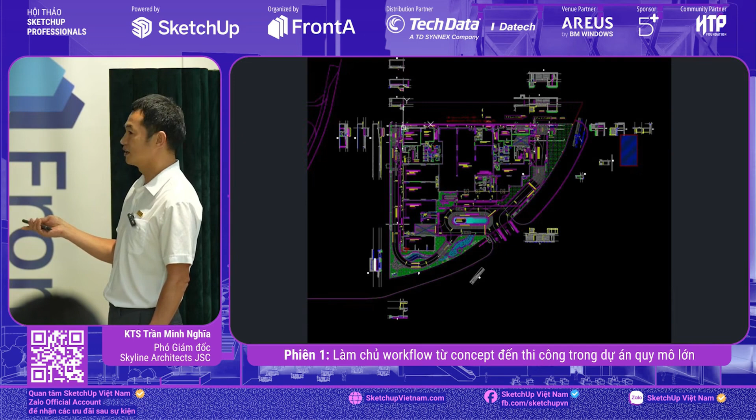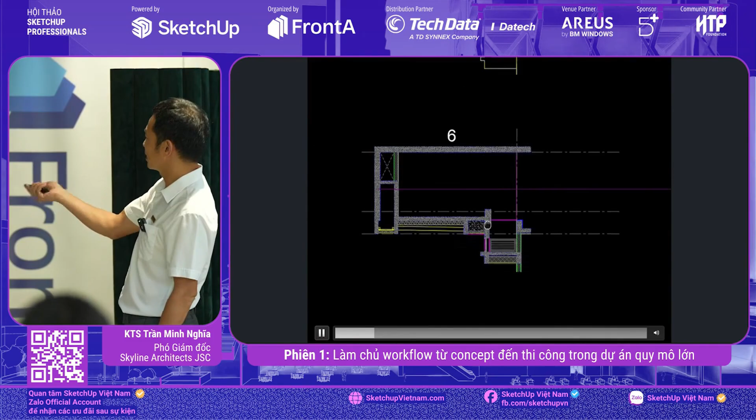Previously, our team used this system. For example, even just for the ground floor plan, we had to create loads of sections for coordination.

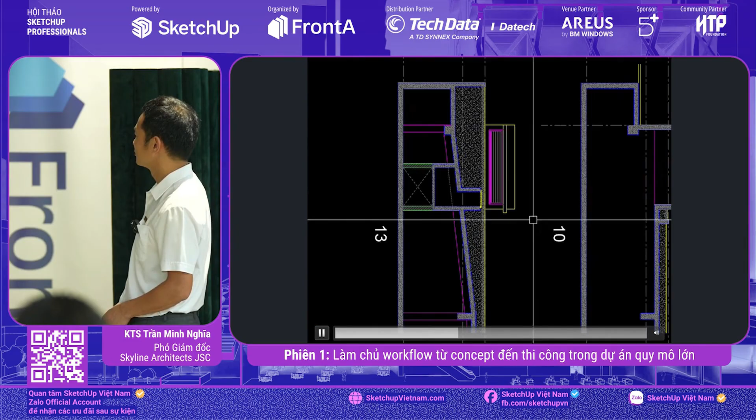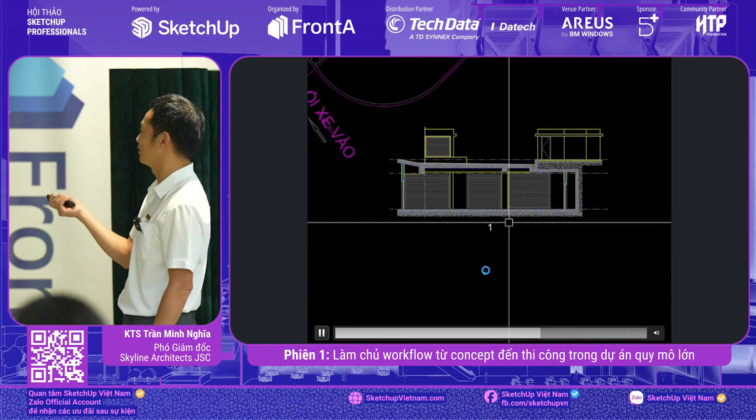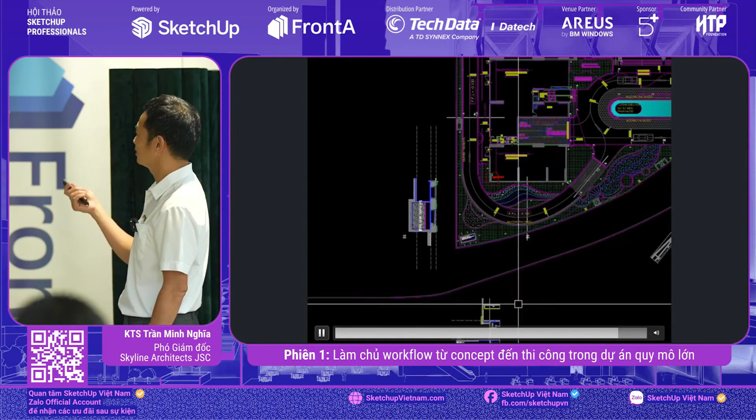The problem with this is that if the structural team changes the beam dimensions, updating everything is absolutely exhausting, and you can never manage to update it all. This leads to situations where something shown might not actually be correct. A lot of effort goes into this, but if a project drags on with lots of revisions, it almost becomes pointless.

Fourthly, with 2D drawings, when you look at them, they all seem perfect. Everything is presented as if it is perfect on its own, but it doesn't actually match up with the other drawings. It's very difficult for the person in charge to check those things. When partners and investors look at the 2D drawings, they can't really visualize the space. With a construction design dossier containing hundreds of drawings, people have to go through each one individually to try and imagine what the final product will look like. Those are the issues with this 2D system.

What's the drawback?

After that, I moved to a foreign company, and that's when Revit was introduced with a whole host of extremely useful features. When drawing walls, you just need to draw, and it already has the brick layer and the plaster layer. With AutoCAD, you have to offset and go through quite a few steps. The walls automatically connect with each other, so you don't need to use the trim command, and when you draw the floor plan, using the cut line immediately gives you the section, detects clashes, and everything else. I found that this was clearly like a saviour compared to the system I was using. Really impressive.

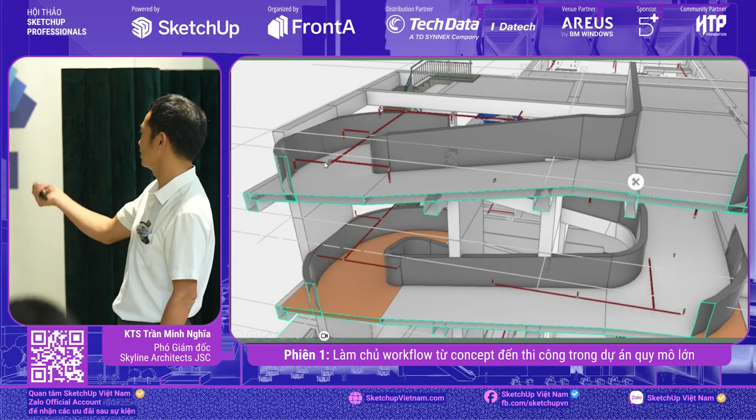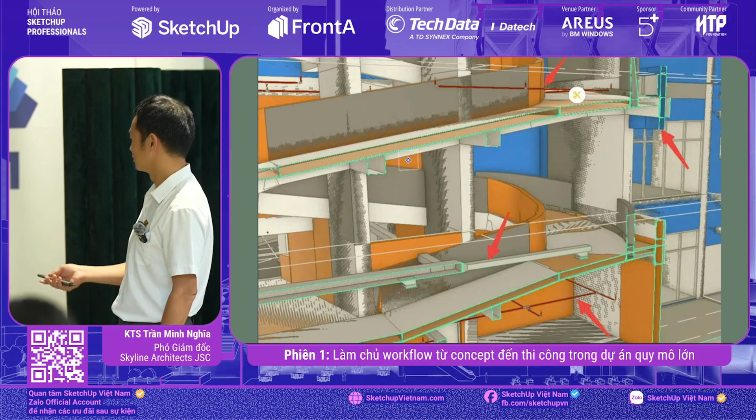And there are a lot of issues. When they draw, they mainly just show it in 2D. But as for coordination, it's all just floating around here. The fire protection piping system's everywhere. The ventilation ductwork. The structural beams are above, while the architectural walls are below. The beams stick out above, sloping along with the MEP systems.

Basically, why is it out of control? That's because I'm assessing a psychological state. There's something called the broken window effect. It means that when you have a rule for something, but you let it slide, you stop controlling it, and you start seeing it as normal, then after that, it's as if that rule no longer exists.

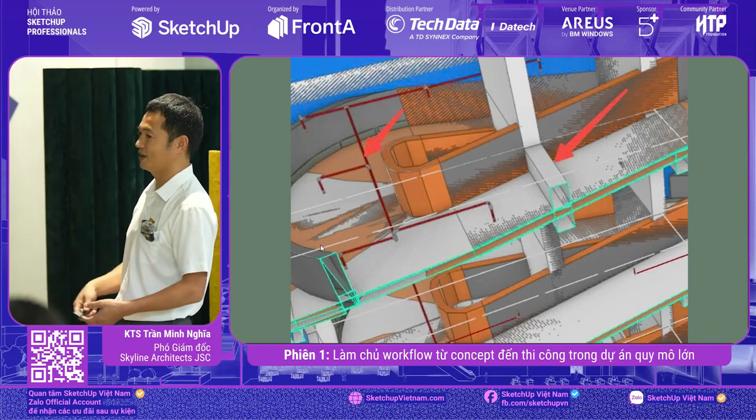With this project, the issue of coordination seems unnecessary, as if it doesn't exist at all. As a result, there are so many fundamental issues that I see as being out of control when you simply can't manage this system. It seems that when the deadline approaches, they just switch things on and off to submit, exporting the 2D documents just to tick the box. But as for the quality of the design or anything else, it's completely out of control.

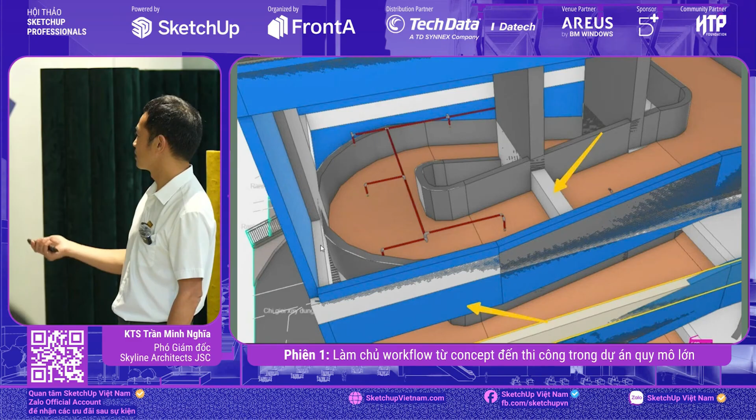Following on from that process with the Revit system, it really doesn't make a difference. It didn't live up to expectations and actually became a barrier rather than a tool that could be used according to my working criteria of simplicity and efficiency.

So at that point, I moved to a new company, which is Skyline, with the hope of finding a new direction, something different. Based on my own thinking, whatever brings efficiency to the company is what matters. So when I joined the new company, I went back to using the AutoCAD system. I found this was still more effective than using Revit in that way.

So going back to AutoCAD, the first thing was the team. At that time, the staff I recruited were all highly experienced and very skilled professionals, each with over a decade of experience. The reasoning was, if you have just 2 or 3 people and they keep making mistakes, it's actually more trouble to fix their errors than to hire someone truly excellent.

So when I returned to AutoCAD, I invited a very skilled technician who was also an expert in AutoCAD. That was Mr. Fong, born in 1979, a friend of Mr. Hung here. He was exceptionally talented at building this system.

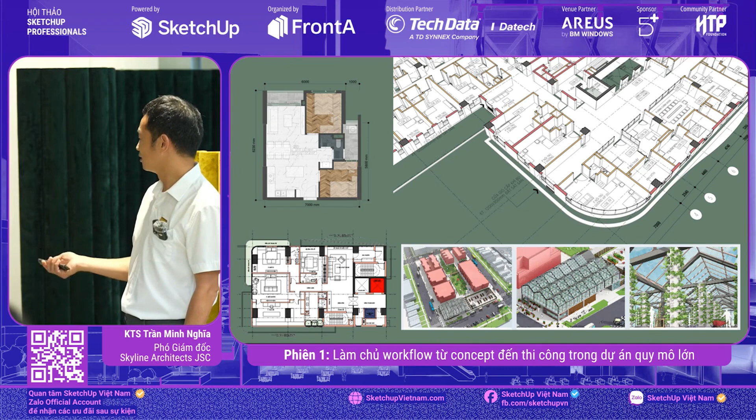SketchUp can handle all of these things, and on our side we hardly ever use Photoshop, we just use SketchUp to present everything directly. So this is one of its advantages. This is the factor that prevents fragmentation, and it's extremely important in a system that you want to control and keep simple.

For example, if you use AutoCAD and want to add colour, you'd have to export from AutoCAD to PDF, then import into Photoshop, then add the colour in Photoshop, and that's it. But life isn't that simple. You'll need to make changes. Today you need to tweak something. Later you need to adjust a bit more.

So you end up repeating that process again and again, 2 or 3 more times. And when you have to do it so often, the person doing it will definitely get frustrated and annoyed. Sometimes you just want to make a small change, but you don't even dare to ask anymore, thinking, why do I have to keep making these fiddly little changes? And when everything is so fragmented like that, the quality of your design will inevitably go down because of software

fragmentation. With SketchUp, however you make your changes, the plan and the facade showing the colour and material will update automatically. You make the change at the start and that's it. You don't have to go through all those other steps, just use the one piece of software, SketchUp. That's an example of how to prevent fragmentation. Our aim is for our software to meet that very standard.

The fourth point is the potential for integration with other disciplines. At present, both interior design and landscaping use SketchUp for conceptual work. At Skyline in particular, both interior and landscape teams develop their construction documents entirely in SketchUp. From start to finish, everything is based on a single central model shared with the architecture team. This approach ensures a very high level of consistency. Structural and MEP disciplines are also developing strongly on the SketchUp platform with the support of various plugins.

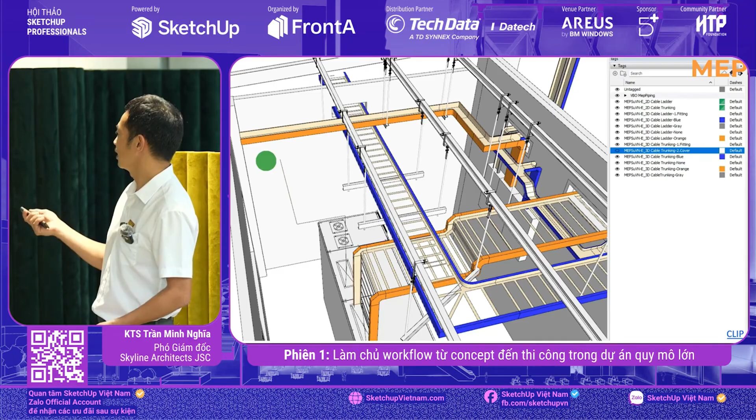Regarding interiors, let me show you a few images. Rolling out interior designs in perspectives and so on is quite standard. These are images of interior layouts created in SketchUp. They are generated from the 3D model. This is landscaping, showcasing various types of floor plans in different styles. Here is the MEP system, including the electrical and plumbing systems. Just showing a few examples here.

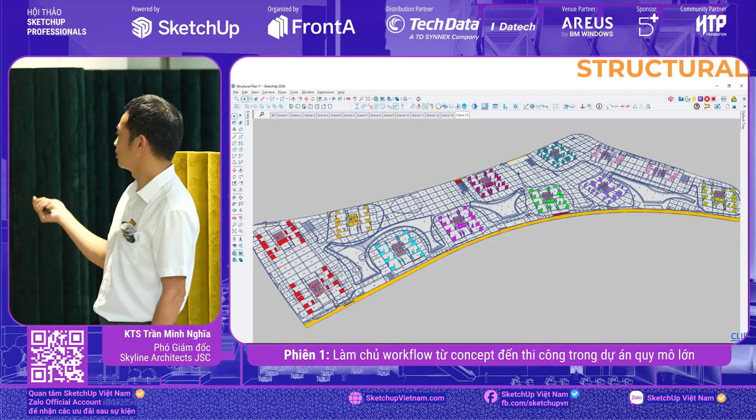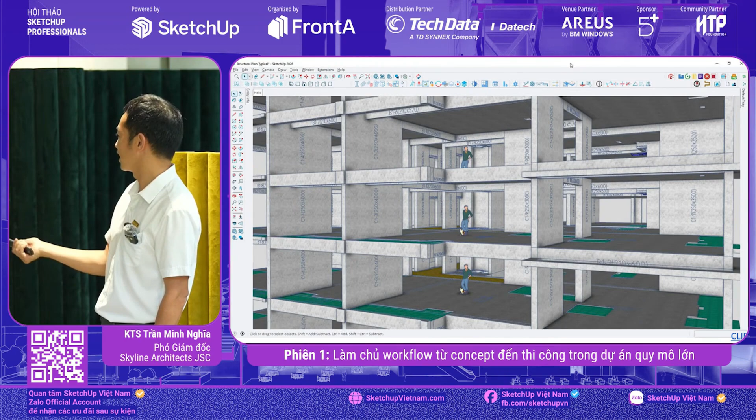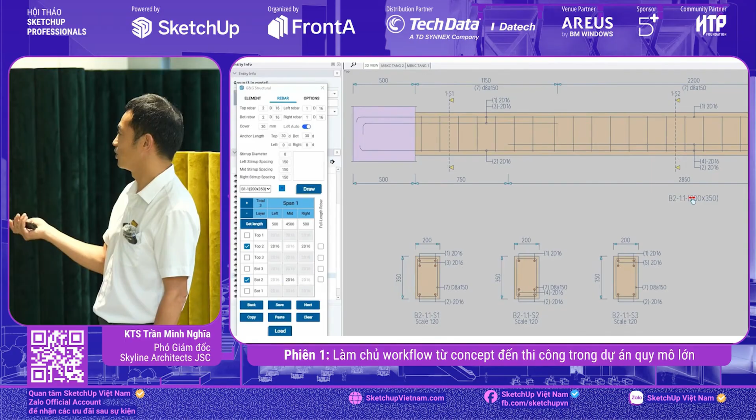As for the structure, this is quite a large project with over a dozen blocks. The structural elements are displayed very intuitively. Just by looking, you can immediately tell the dimensions of each column and beam. It's extremely easy to manage. Which areas are sunken slabs or anything else? As for drawing the reinforcement, it's automated, so we no longer have to draw each individual bar.

To talk about the workflow, just using SketchUp alone isn't enough. It's only a necessary condition. SketchUp helps us create drawings and attach information and so on, but it also has certain limitations. It can't integrate all information into a single model in the way that true BIM does. It's quite restrictive.

In SketchUp, they've added another piece of software for coordination, which is Trimble Connect. So all the architectural models, whether we split files or whatever method we use to draw, are all gathered into this central model. And in this model, we go in and manage everything from design to coordination between disciplines, clashes, or anything else, all within this model.

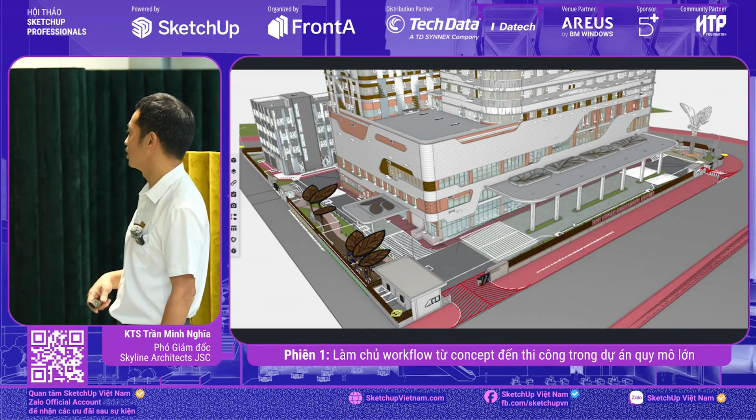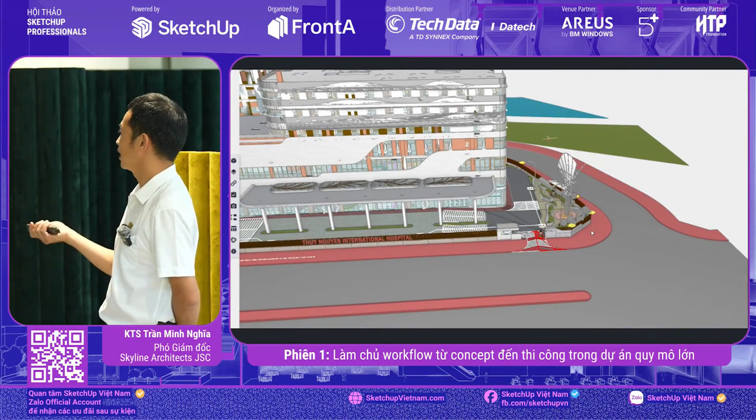This is the 500-bed hospital project carried out by Skyline. It includes all disciplines: architecture, structure, interior design, landscaping, and exterior lighting.

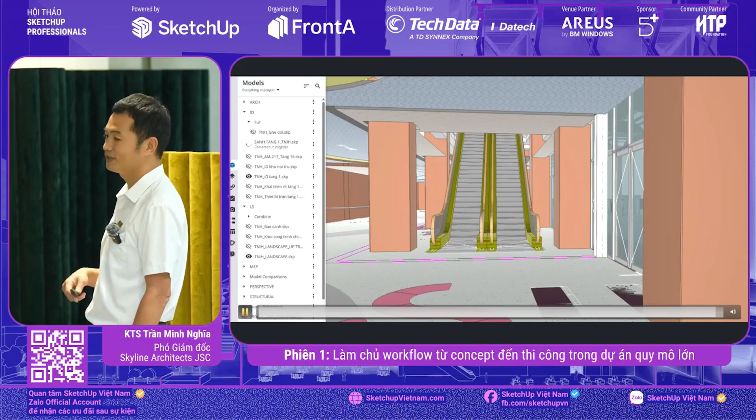When everything's displayed on this single model, we can assemble all the files together so we can turn things on or off or observe whatever we want. Here, we can check whether the space we want is correct and whether there are any issues. We'll control everything from there. It seems that we no longer have to go through each 2D drawing to see what the design is like. Instead, we can directly check the design spaces in 3D. Regarding the ideas and the dimensions,

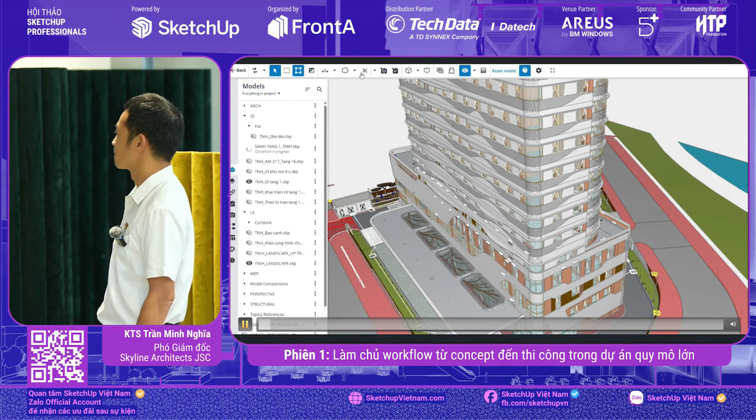for example, here I want to check the staircase or something like that. And here I want to check this staircase to see how it has been designed. This Trimble Connect is extremely lightweight. It might look a bit unattractive, but it is very light indeed.

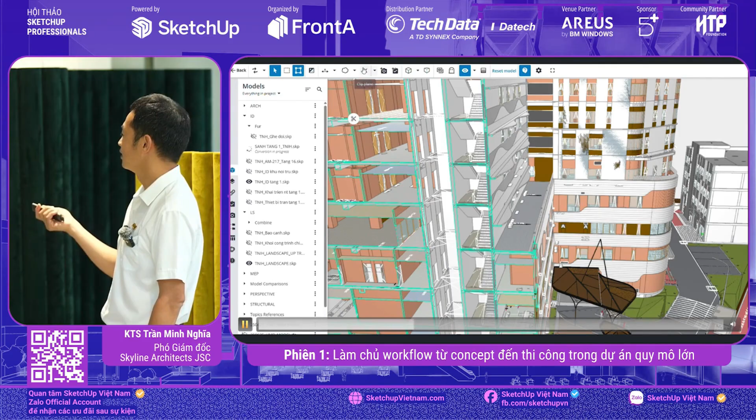Because, for instance, you can use your phone when you go to the construction site. You can use your phone to open it up, pull up the sections to check whether the dimensions at that spot are correct or not, and just by looking you can see what's extra and what's missing. For example, on the model, it's quite intuitive.

So Trimble Connect is an environment where you can manage the design aspect and check for clashes on that model either manually or automatically, as it has tools for both.

Now, the third piece of software that I want to introduce is something indispensable in this workflow. This one leans more towards digital transformation, so to speak. As it happened, the company also came across this software and found it quite suitable. Afterwards, when combined with SketchUp, they complement each other and it's extremely effective.

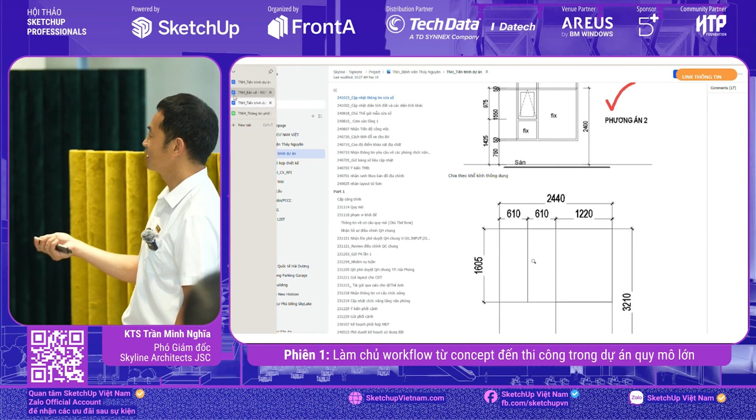What's the purpose of this? So that when we assign tasks, for example, if 3 people are drawing 3 different floors and all of them are drawing windows, they can all come here, read this information and carry out the work. It's not necessary for one person to specialize in windows. That person can do any task at all, because the system we've built allows everyone to access the information, and the most up-to-date information is always displayed at the top. Any outdated information is crossed out, so we can keep track of the history and see how things were before. And it will be linked to the design process and the project's logbook.

And all the evidence is kept, including how the investor reported things. This avoids using Zalo, where when you need that information, like when something was confirmed or what the details were, you end up searching for keywords, and sometimes you find it, sometimes you don't, and sometimes the image is gone altogether. These projects often drag on, some last for years, so information on Zalo tends to be lost completely. Therefore, all information must be kept. Any evidence or documentation needs to be saved.

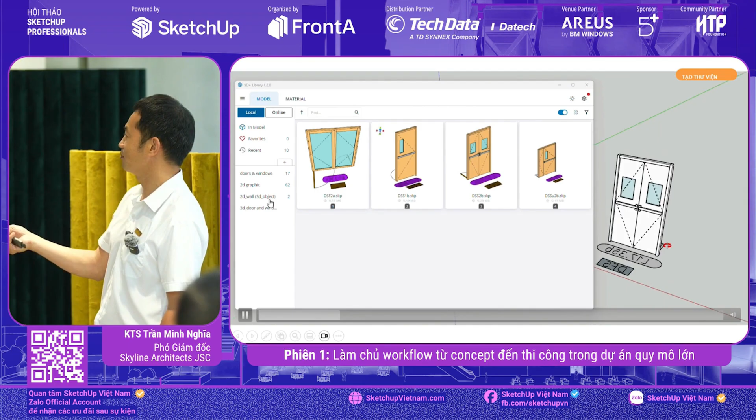So how do you combine such information with SketchUp? For example, drawing a door. Then I'll create a door library here, combined with the 5D library plugin. So the person drawing the door will go into the... Sometimes when you place a door, all its parameters are already available. Someone will set this up according to the input requirements. So a library will be created.

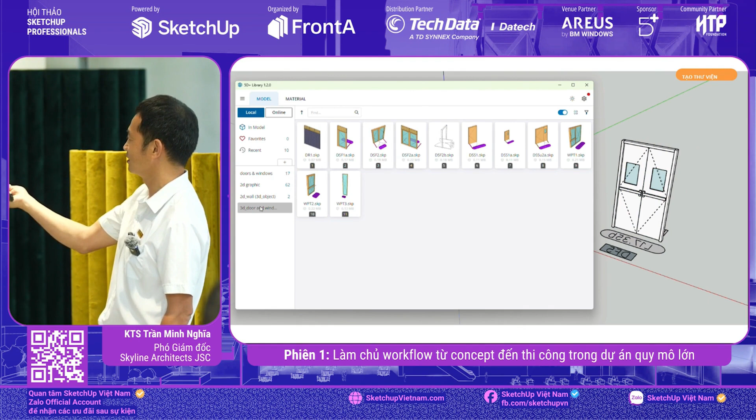For example, for the doors in the auxiliary building, there are only so many doors. When you come across a 2D door there, you just take the 3D door and place it into the 2D drawing. There's no information attached, it's just a single or double leaf door. But for each of those doors, the corresponding 3D door has already been set up in this library. All you need to do is insert the 3D model into the correct 2D position.

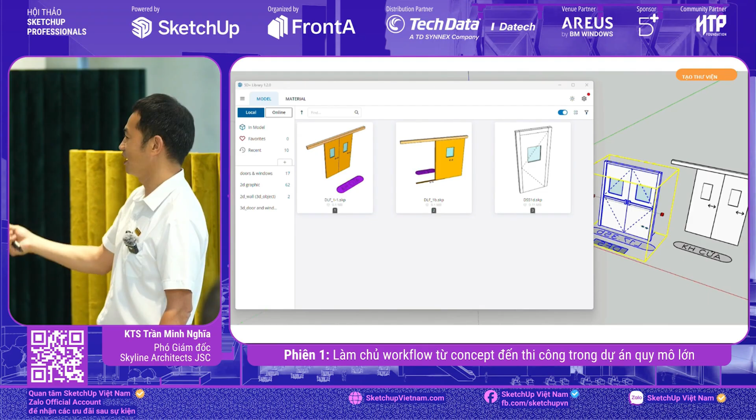When you select these 3D doors, the schedule will be generated automatically. No need to enter any additional information at all. The schedule will depend on the dimensions, and you can adjust the size of each door according to its position.

Here is a table for coordinating the different disciplines and information with each other. If we use Zalo or other chat applications, the information shared can easily get lost. Once it's lost, you can't remember when it was discussed or what the response was. Here, everything is saved as separate items, each with a status showing whether it's been resolved or not, making things extremely clear. And whichever discipline's involved, you can filter by that discipline to see exactly what issues remain for you. So in a project like this, all information must be completely clear.

So this is for the in-out section. I'll also show an example from the 500-bed hospital project. Let's say we filter by legal procedures. You'll see that from the initial approval to the construction permit, it takes about 4 months. That's the 500-bed hospital project with a 4-month timeline, including the wait for legal procedures. This demonstrates just how efficient the system is. Honestly, for a project like this, if you were to use Revit or AutoCAD the way I've experienced before, it would be absolutely unimaginable.

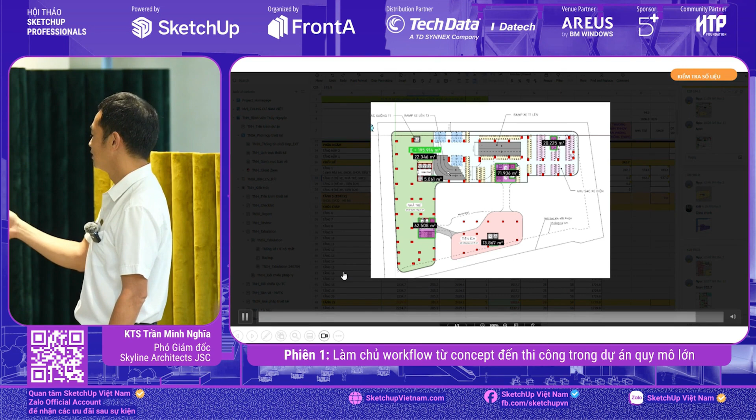These parameters are no longer just figures you have to imagine. There's a reason behind why things are done that way. And when you click on a particular figure, you'll see the area measurement image right there. So the person in charge can click on it, check, and know whether it's correct or if there's been a mistake in the measurement. But if you just hand over a 2D drawing like this, there's no way to keep things under control. Exactly. The areas where the coefficient isn't applied are also very clear when you look at them.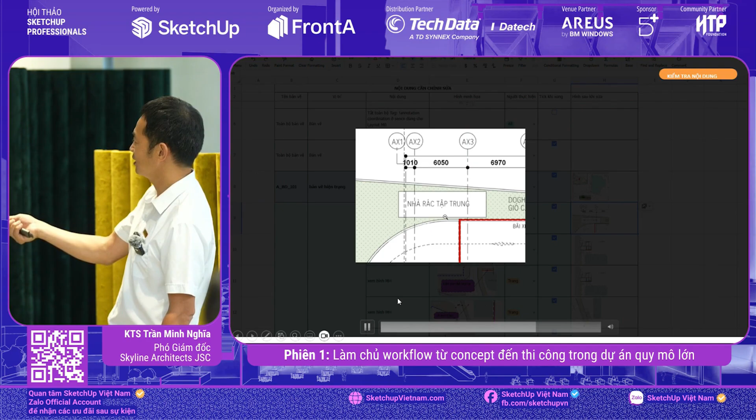Then when it comes to editing the drawing and leaving comments and so on, how do we manage that? For example, here I have some illustrations for the content that's been amended. For instance, this symbol here is incorrect. So after you've made the correction, you'll take a photo and paste it into the after correction column. That's it. And whoever carries out the task will tick this box here. So the person in charge just needs to click on the illustration of the image that needs correcting, and then click on the image showing the result. That way you can see how it's been amended and whether the correction is correct or not, and that's it.

Normally, people will leave comments on the PDF and assign the corrections to the staff team. Once the corrections are done, the person in charge opens the PDF with the comments on one side, and then starts looking back and forth, back and forth. It's extremely time consuming and mistakes are bound to happen.

Besides that, I also use this LUT for the training system. Everything that's already been covered in training is stored there. And when new staff join, they can come in and read it. So I don't have to waste time repeating things I've already explained. There are also instructions available.

If there's anything I haven't explained yet, I'll explain it, and then the person who's been instructed will know. Then they'll write up the instructions here, and I'll check whether what they've written is correct. By writing it down, they pay more attention, and their ability to absorb the information becomes more serious and accurate.

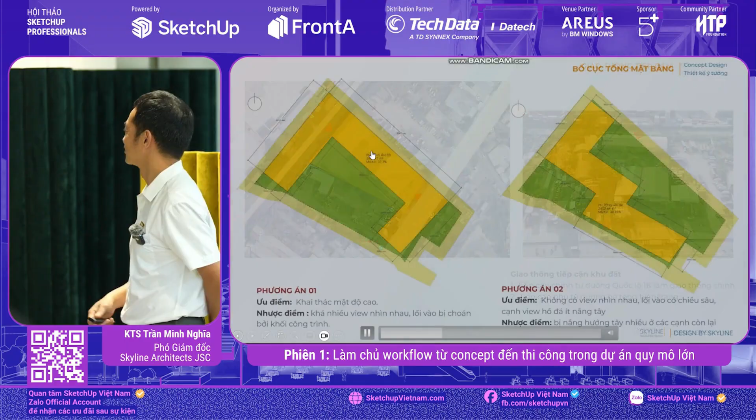All of this analysis is done within the pre-concept stage. Once you've drawn it in SketchUp, you've got your file ready. For the overall schemes, usually for each apartment project, our team prepares around 10 or more master plans to consider all the pros and cons.

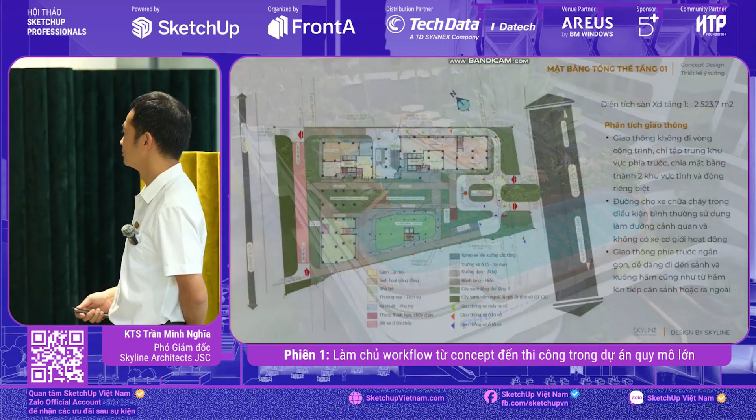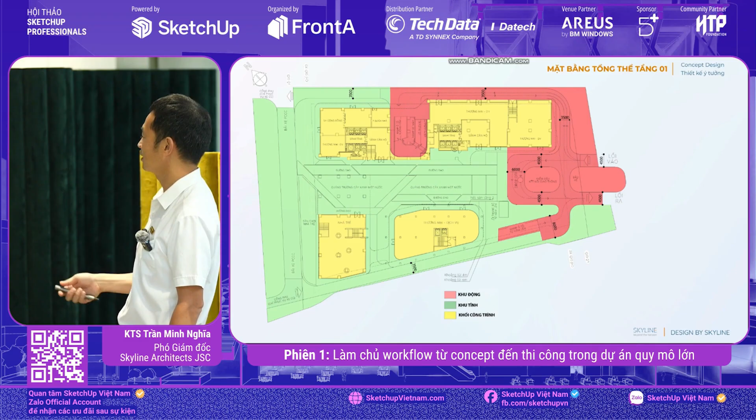Perspective renderings are already quite familiar to us. As for the layout, it's all done entirely in 2D, nothing in 3D at all. We use faces and add colours to them. When analysing movement and static diagrams and so on, it's all done with these faces. It's better than CAD because you don't have to keep exporting and importing files for the different floor layouts.

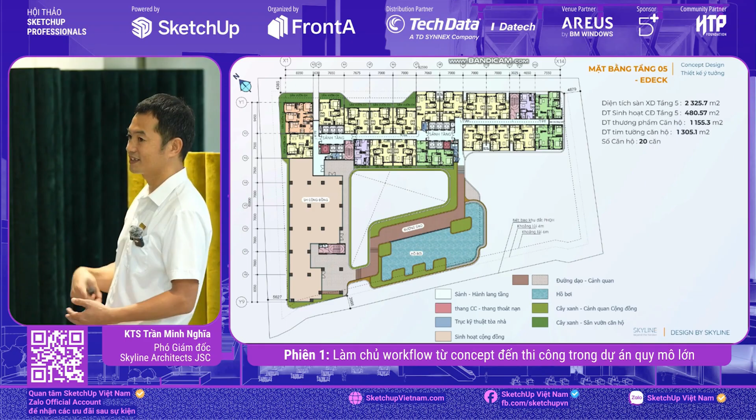For example, with the units here, you can separate them to see which ones are 2-bedroom or 3-bedroom flats. That's just the way SketchUp displays styles. At this point, if I switch to a different style and display by material, it looks like this. Still on the same face, I haven't drawn anything extra. I just assign a colour to the tag and the material so I can show a lot of different styles.

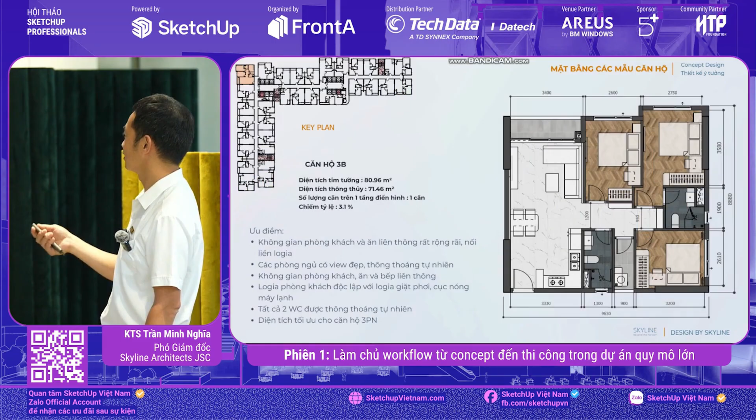This is extremely basic in SketchUp and doesn't require much. The units and calculations are done on LayOut. And the slides are also LayOut slides without using any additional software, Office Suite or anything else.

Then comes the technical design documentation and construction design.

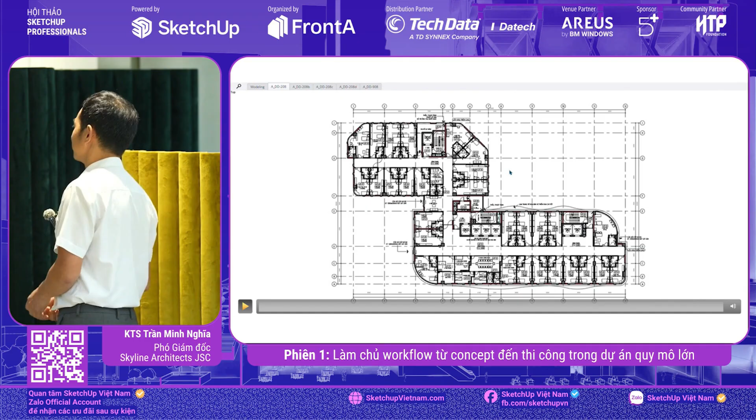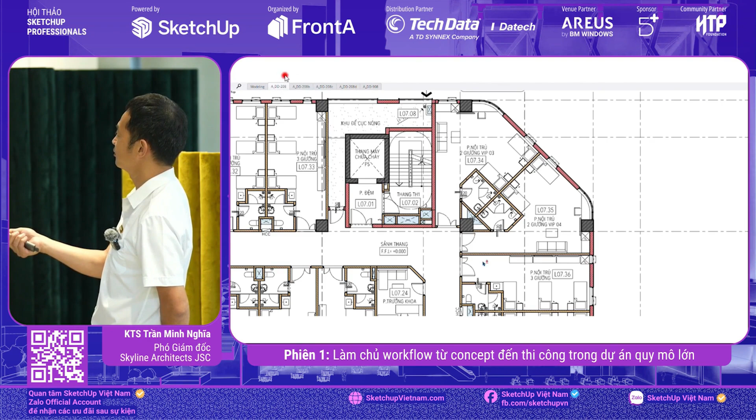With just one SketchUp file, I can have many things. These are also different styles, and I assign materials and tags to them. So we'll have the different floor plans. Firstly, the architectural floor plan, then the ceiling plan, and the finished floor plan.

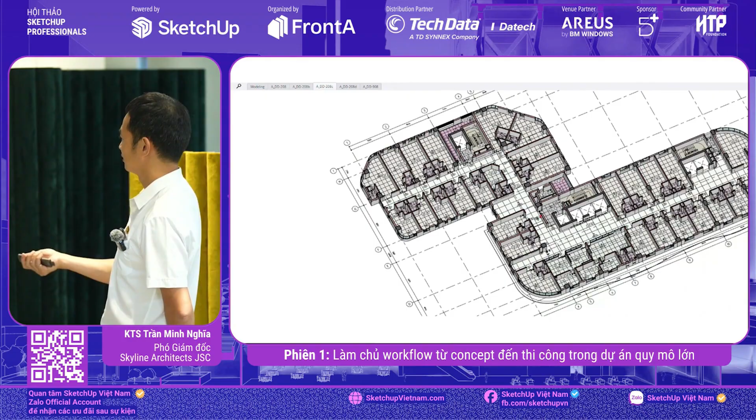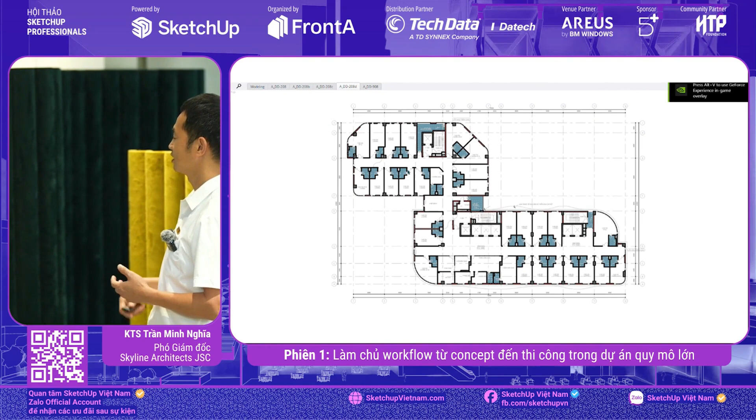At the technical design stage, it's in 3D, whereas in the earlier stages, we only use 2D. So it's very flexible for our design work. Whenever we need something, it delivers just that. There's no need to be constrained by any extra procedures.

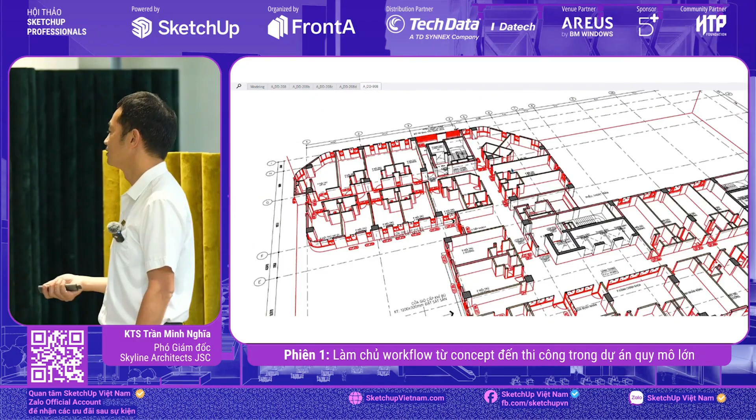Here is the door positioning. Once you finish drawing, you immediately have the door schedule. No need to create any tables or input numbers manually.

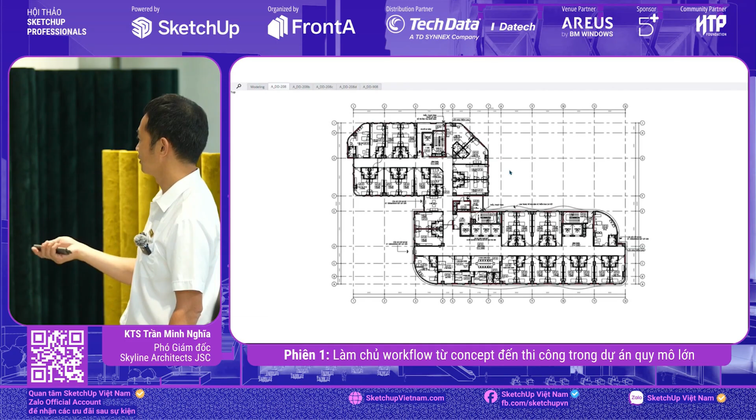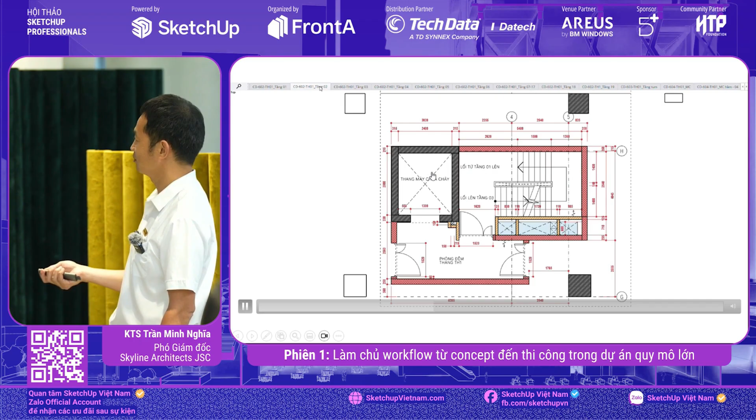Developing details, for example, stair details, for instance. Everything is on a unified model. Combined with the structural model are these concrete parts here. That's the structural model, which I didn't draw myself. It ensures the accuracy of the structure as it actually is, so the architecture matches up perfectly. There's no longer the issue of these two disciplines clashing on site.

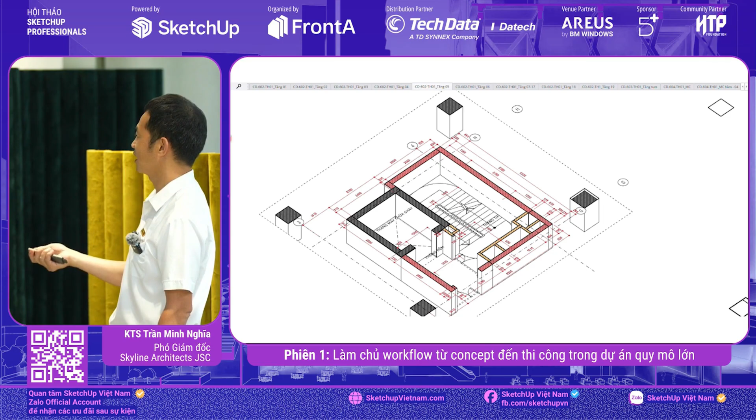And for this structure, we use SketchUp rather than Revit.

Now, regarding the coordination part, as I mentioned earlier about Trimble Connect, there are quite a lot of things involved here, so I'll just touch on it briefly.

Hang, you covered that part earlier, didn't you? All right, well, we can sort out any exchanges about that later.

As for the final part, which is how SketchUp exports the drawings, with SketchUp's default tool, we can only export it in one way. It's very difficult for different disciplines to interact with each other, and especially with large projects, the contractor will need to produce shop drawings. If your exported drawing only has one layer like that, how can you create shop drawings?

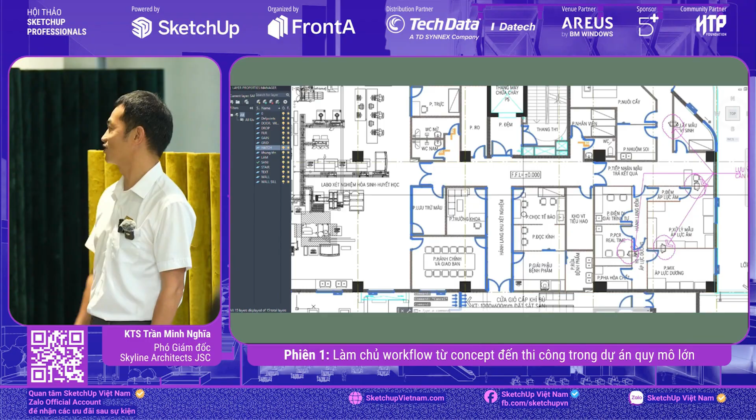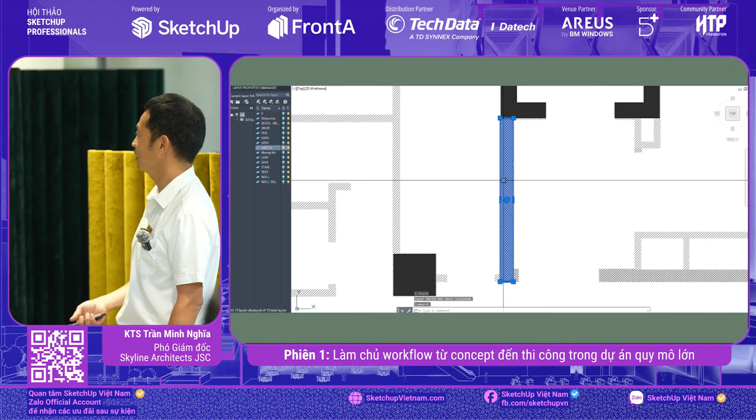Here, with the support of the 5+ tool from Kwong's team, export into AutoCAD is done very methodically and layers can be separated. Furthermore, these specific hatches will also be converted directly into hatch patterns within the CAD software. When you take a closer look at the final result, it is also exceptionally neat and well organised, with nothing messy about it at all.

And for this project, we also exported this for the contractor to use for shop drawings, and there were no issues with this at all. That's how we communicate with the other parties.

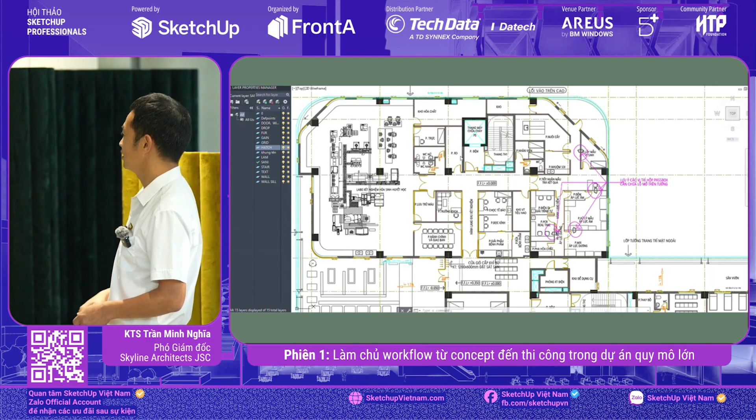Perhaps I'll go back and talk a bit about Trimble. With coordination on Trimble Connect, you can upload your Revit files directly, and SketchUp files can be uploaded directly as well. So those two models can still coordinate with each other. That means Trimble Connect now supports quite a lot of common file formats already.

If there's no supported file format, then all BIM software can export to IFC, even SketchUp. IFC is a universal standard, a common standard that the Ministry of Construction also requires for BIM submissions. You have to submit IFC, not Revit or any other format.

So you can think of IFC as being like English. Revit is like Thai and SketchUp is like Lao. If those two want to talk to each other but can't understand one another, then just speak English. The English environment is like the IFC format that's currently regulated. It's an international standard, and SketchUp also follows the format and the latest IFC regulations, which is IFC 4.

With the workflow and the orientation towards digital design, our current team of personnel is about 25% management level, while the remaining 75% are staff involved in design and related tasks. There's a notable point - this 75%, compared to the days when we worked with AutoCAD and had to recruit people with over 10 years of experience, now only have 1 to 2 years of experience.